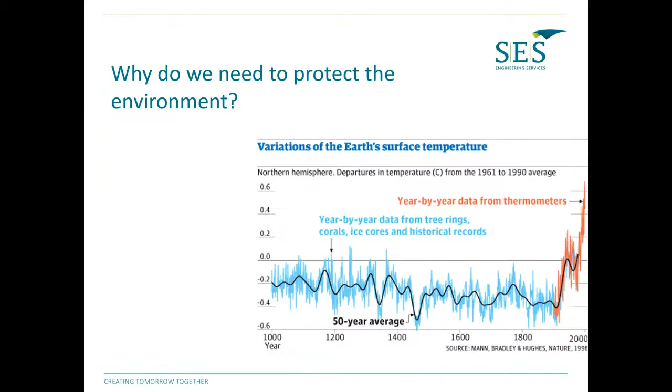So more about sustainability and why it's such a hot topic in construction at the moment. Why do we need to protect the environment? You'll see from this graph how much the Earth's temperature has risen over the years. Global CO2 emissions are rising because of our activities - it's human activities causing this, so we need to do something about it.

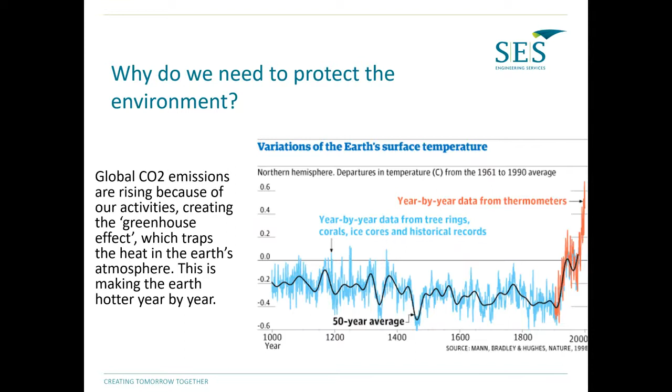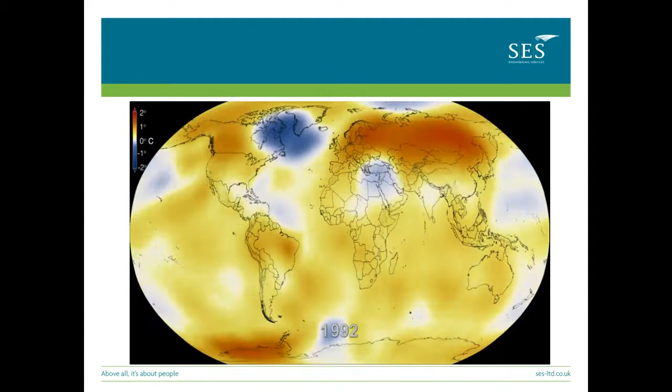So if temperatures rise too much, we'll have problems such as extreme weather conditions.

Flooding is one of the problems we've seen recently, along with rising sea levels. For the UK, this means some parts of our coastline, in many years to come, not in our lifetimes, will start to disappear.

So what's this got to do with construction? Well, what does the UK's built environment contribute to CO2 output? When I talk about the built environment, that means the demolition of buildings, the construction of new buildings, but also the running of existing buildings.

So the running of your schools, colleges, offices, hospitals, they all have an effect on the CO2 output of the built environment. Around 45% of the UK's total carbon footprint comes from the built environment, which is quite a large amount, so we have to do something about this.

So we're looking at many ways to reduce the impact, and this starts at very early stages, from design stage. We need to look at site selection, which can also be important, and we measure our impact on the environment, economy and local community.

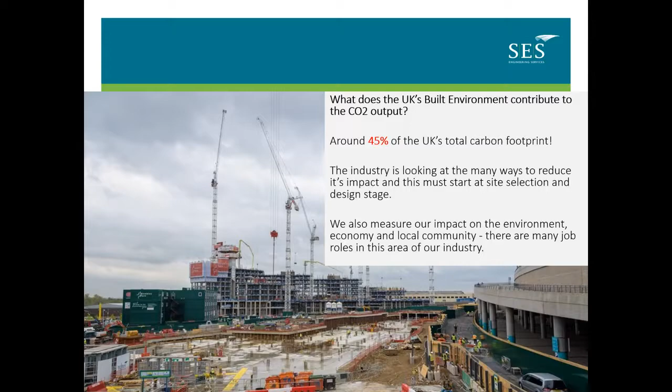So yes, we have to do it. We want to do it, but we also have to do it.

So how can we tackle this in the built environment, in this industry? There are endless ways which construction can improve sustainability. So where do the emissions come from in construction?

The materials we choose to build the buildings, the vehicles and equipment we use to build, and also the operational side of the building - the running costs, the heating, lighting, and water usage when they're running.

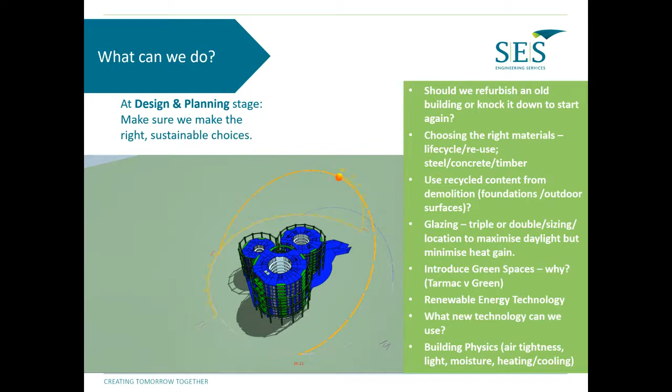So what can we do? At design and planning stage, we must make the right sustainable choices. This video here shows how the sun can affect buildings - how it moves around them, which would have an effect on lighting and also the temperature inside the building if there's a lot of glass, for example.

So from the start, we need to look at whether a building that's sat there existing can be refurbished or needs to be knocked down. Obviously, refurbishing a building is much more sustainable than knocking it down and starting again, but sometimes this isn't always possible. We need to choose the right materials.

Can we reuse old materials from a demolition, for example? Can we use recycled content from demolition or even from elsewhere? Look at the glazing option too.

That would help maximise daylight, using natural light rather than artificial light. But we need to minimise heat gain, making sure it doesn't get too hot with the sun coming through the glass. That's what our building physics engineers do - they look at all that, how the building will work when it's running.

Introduce green spaces - we'll talk about why these are important in a few more slides. We've said tarmac versus green there, but we can also have green spaces inside buildings, with green walls and lots of plants throughout the building too.

Renewable energy technology - you've all heard of wind farms and solar power. We try and use renewable energy wherever possible. What new technology can we use? Technology is a huge driver in sustainability, and there's lots of new things coming out that help us work better and smarter.

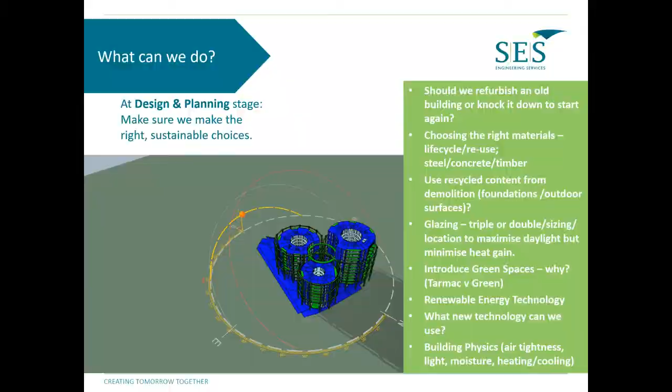When we design a building, we need to make sustainable choices. The main contractor or building company, not us as mechanical and electrical engineers, would look at the material they use to build the building - they could look at timber or concrete. Timber is obviously renewable because if we cut a tree down, a new one can be planted, so this makes it really sustainable.

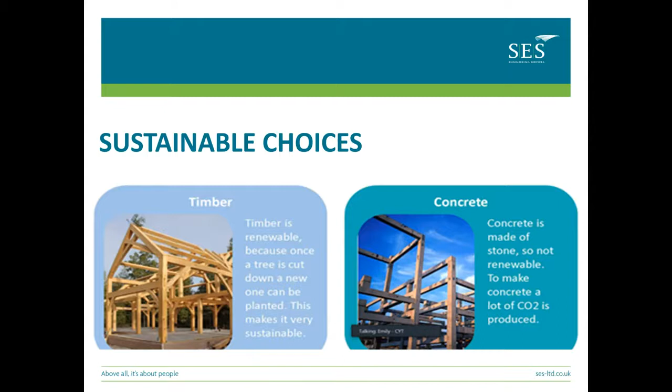Concrete is made of stone, so it's not renewable, and when you make concrete, a lot of CO2 is produced. So that is not as good for the environment as timber. That's just an example of one of the choices that can be made.

Timber is renewable. It can be cheap, but on a large scale it can be quite expensive, to be honest. But we also need to be sure we're sourcing the timber sustainably - wherever we're getting the timber from, they are planting new trees every time they cut one down.

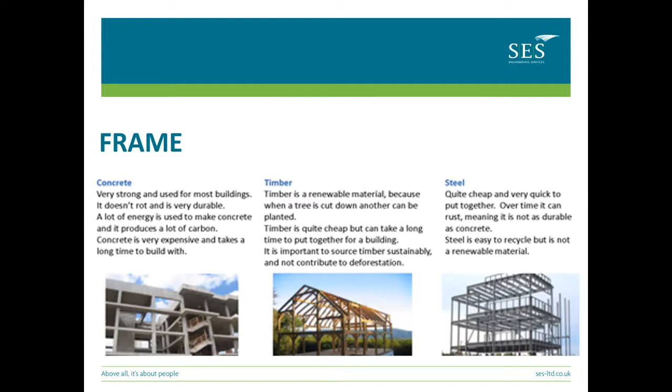Steel is cheap and quick to put together, but it's not quite as durable as concrete, though it is easy to recycle, although not renewable. So you can see here a few of the choices we make for the frame.

The roof - we talk about a pitch roof made of timber. We already know timber is a renewable material, but timber used in large amounts can be quite expensive, so that needs to be considered when looking at the cost of building.

Green roofs - a green roof is a flat roof covered in plants. It helps absorb CO2, attracts wildlife, and can capture rainwater too. It's quite quick to install, but it can be quite expensive. It does bring many benefits, and a lot of clients are choosing this option now because of the sustainable benefits it brings.

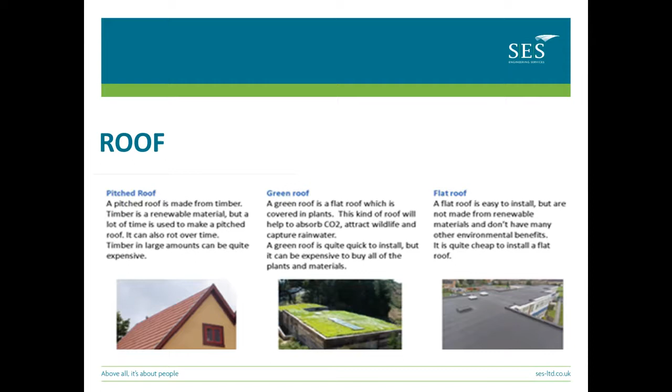And there we have just a normal flat roof - it's not made from renewable materials and doesn't have many other environmental benefits, but it is quite cheap to install. You could have a mix of different types of material used as well - you don't have to stick with just one all the time.

The walls of the building - we sometimes look at brick, timber, or steel. We've already covered timber and steel, but brick is made from stone, which is not renewable. It is fairly durable, but they're held together by mortar, made using cement, and cement produces a lot of CO2. Also bricks can be expensive and take a long time to build with. So all this needs to be considered during the design phase.

And here we are, landscaping - in an ideal world we would probably have a mix of all three. You've got your tarmac, which we need if we have cars parked on there - it's a hard surface, but it isn't good for drainage. We have grass, which is quite cheap and can grow quickly. It will absorb CO2 and gives a nice green area to look at as well.

At schools you will have playing fields with grass, but it's also important to have a biodiverse area too, meaning lots of different species of plants that attract wildlife - that wildlife could just be insects, bees, etc. Very important. These plants can take a long time to grow once seeds are planted, and if you buy established plants they can be quite expensive, but the environmental benefits are fantastic. So it's important, I think, to include biodiversity in our buildings.

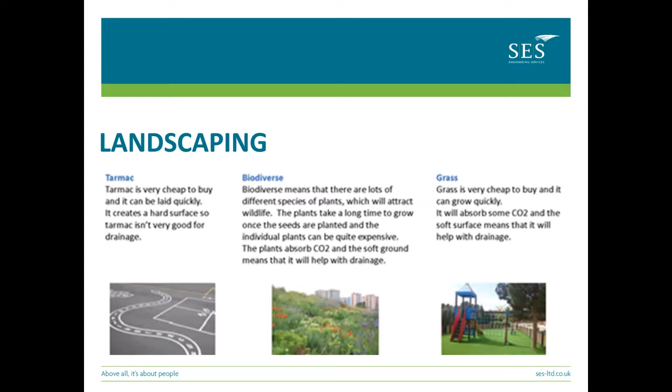And then we think about the inside of the building, so your services and your energy.

Natural ventilation is obviously the most sustainable option, but it can sometimes be hard to control. You might have a window open, but you've got noise outside, so you have to consider the area where your building is. If you have air conditioning or heating, opening windows can be expensive, and then you've got to think of the CO2 emissions for the running of the building as well.

Renewable energy is obviously something that we try and incorporate. It doesn't take any longer to install than other forms of energy, but can be a bit more expensive. So that's a lot of the considerations we have to think about when we are designing a building.

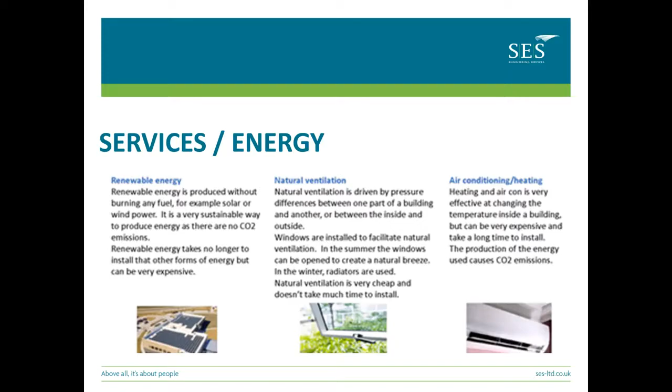So during construction, we need to look at renewable energy on site, so in our cabins, our vehicles and machinery. Minimise water waste, so we think about rainwater harvesting. Recycling and waste management of materials, so we want to reduce the waste going to landfill. This might mean having different skips on site so that some go off for recycling, and we try and minimise what goes to landfill. I think last year we had 98% of our waste diverted from landfill, so that was fantastic.

We like to include green space on our building sites as well. It not only helps the environment and the wildlife, but it also gives our people on site a nice area to have a break from work too.

Well-being is very important for our staff. We try and look after the well-being. It's a high priority for us.

We also consider transport costs to reduce vehicle emissions. Can people get public transport to our sites, or walk or cycle? So we like to include showers on our sites, so people, if they jog, walk or cycle to work, they can get ready for work on site. And we also provide bike storage too.

And we also need to consider the impact of construction on the surrounding area, so how it affects the local community. Make sure we're not parking in front of people's houses, we're not delivering at 6 o'clock in the morning and waking people up, or that we're not making a mess on the road outside. There's no dust or dirt getting moved around the area too, so we have to be considerate of the local community.

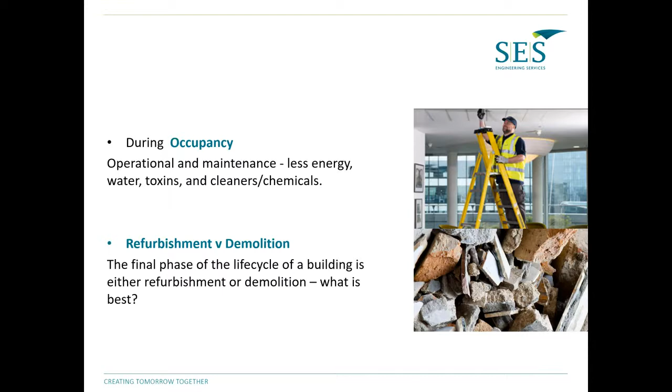So now, this is one I wanted to talk to you about. You may well have seen this in the news. This is a project that we're working on in Manchester. If you haven't heard about it yet, I'm sure you will in the near future. It's a new arena that is being built near the Etihad Stadium in East Manchester. It's one we're working on at the moment with BAM Construction, who are the main contractor.

It's a new kind of venue. It's one that has sustainability at its core, both in design and the future operations, so when the building is running. It's going to bring huge local economic and social value, so it's going to benefit the local community massively. And it will also help the council deliver its ambition to be zero carbon by 2038. It's going to be the most sustainable music arena in the UK and Europe, and it's coming to Manchester.

At the moment, it is just a hole in the ground. If you drive past East Manchester, past the Etihad Stadium, you will no doubt see all the activity going on there. It's going to be sustainable in the way that we're looking at renewable energy, energy efficiency, low carbon technologies, and intelligent building and lighting design. It's already got great public transport because of the tram line that goes up to the Etihad Stadium already.